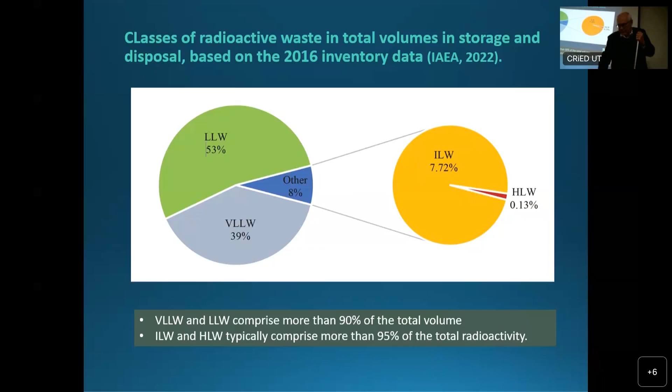So if we look at the aims of disposal of radioactive waste, I think it's quite clear it should contain the waste, and the waste should be isolated from the accessible biosphere. It should be kept away from humans and from flora and fauna. But also reduce the likelihood of an inadvertent human intrusion into the waste. So, for example, if there's a mining activity for whatever reason, it should be avoided that, because it is no longer known where this waste is, this waste is touched.

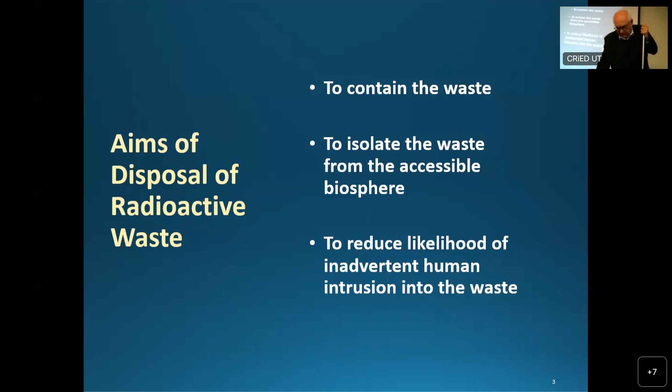We have different disposal options for the radioactive waste. For example, one is near surface, and one is in deep geological formations. The near surface is mainly for short-lived radioactive waste, so it will decay within a limited amount of time, and for low-level waste, also for intermediate level waste. And such disposal sites are already available in many countries. This is an example from Spain, which is for this short-lived radioactive waste, intermediate and low-level waste.

Then the next thing is the geological formations. In principle, this could be done for all types of waste and disused sources. Disused sources are, for example, small entities which contain a high concentration of radionuclides, which are used in medicine for treatment or for irradiation of food, which is done in some countries. However, geological disposal is in particular done for high-level waste, and this is for spent nuclear fuel and waste coming from reprocessing. However, such disposal facilities are not yet available in most countries.

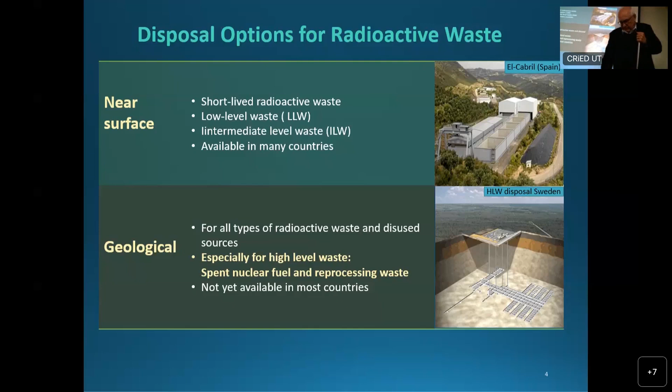So, when we look for disposal in geological formations, currently we discuss in principle three kinds of host rocks: salt, big salt formations, clay formations, or crystalline, for example, granite. So let's look a little bit more into detail at these salt formations. Salt has very specific characteristics. For example, rock salt behaves plastically under pressure. This means if there are some cracks, holes or fissures formed, due to the pressure of the overlying rock, they will be filled and closed. And if cracks do form, they are healed very quickly. This is a big advantage.

One other thing is the permeability. The permeability, this means the diffusion, for example, of radionuclides or of material through salt rock, is very, very low. And it can be considered nearly impermeable, which ensures the isolation of the waste in the disposal area. High-level radioactive waste produces heat. It produces heat for a long time because the radionuclides are so concentrated. By the way, if you go deeper and deeper in the earth, it gets warmer and warmer, and part of this energy is due to the radioactive decay of natural radionuclides.

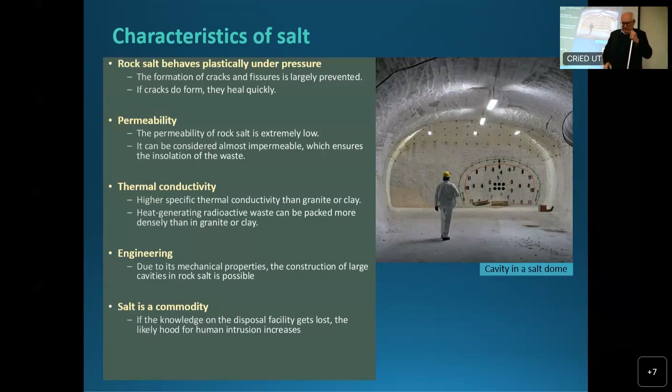Let's have a look at clay. Clay also has some very good characteristics. It also has some characteristics which are less favorable. For example, clay is impermeable to water. Once the radioactive waste is disposed, it will remain there in the disposal. And the water with the dissolved substances in the rock pores is practically immobile.

Another thing, you might know that clay has a great sorption capacity for cations. This means cations are sorbed readily. This means that the movement of cations in a clay formation would be very, very low. However, we also have some anionic radionuclides, as for example iodine-129, technetium-99 or selenium-79. They are anionic and they are not bound by clay.

Another good characteristic or feature is that clay swells in contact with water. So in contact with water, it absorbs the water and the volume increases. And this means if there are any cracks, the cracks will be sealed quite quickly.

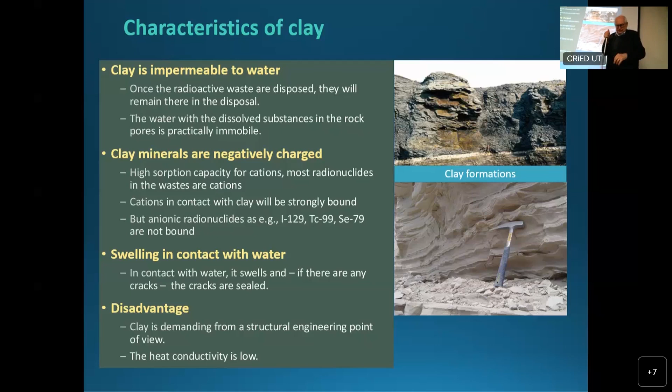Another host rock which is studied worldwide is crystalline or granite. Crystalline is a hard rock. And usually it occurs in massive forms. Examples are, in Canada, the Canadian Shield, which is mainly built of granite, or also Scandinavia and Sweden. This is more or less granite.

The permeability of crystalline depends. It is very low if the granite is not fractured. However, granite tends to have some fissures and fractures, and this would then cause a higher permeability and would also enable water to percolate through this granite. This is something which we in principle do not want. And therefore, because in this case the natural barrier is less effective than in salt or in clay, we have to have more engineered barriers.

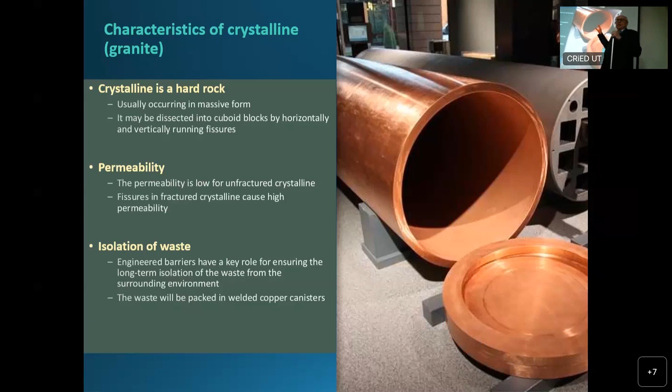And in the waste disposal projects so far dealing with granite, the waste is put into copper canisters, and these copper canisters are very carefully welded and then put in the ground. And in addition, as an additional barrier, these canisters are surrounded by bentonite to enable the sorption of radionuclides should they be released from the canister. So we need some additional engineered barriers to enable the long-term isolation of the waste.

Here you see a comparison of the three kinds of host rocks. In green we have the favorable features. In red are the unfavorable features. And yellow is the middle, not really good, but also not really bad. So you see, all of these different host rocks have advantages and disadvantages. So for the thermal conductivity, salt is quite good. Clay is low and crystalline is medium.

The permeability of salt and clay is very low, but it may be high for crystalline if the crystalline is fractured. The firmness is medium for clay and for salt, but very high, of course, for granite. This is a hard rock. The deformation characteristic is positive for salt because it closes cracks immediately because it's creeping. It is closing any fractures. It's medium for clay, but crystalline is quite brittle. It does not have such a tendency of self-healing.

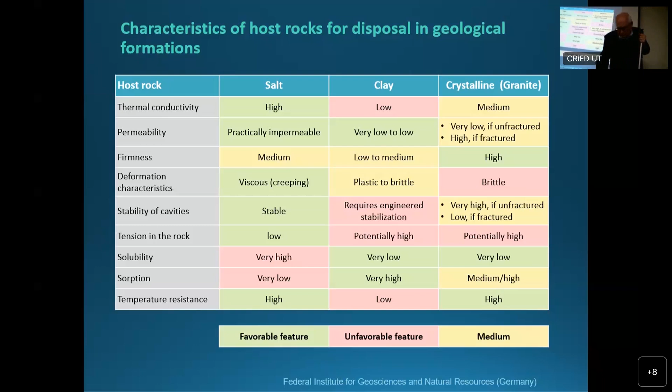Now, let's look at some examples of disposal facilities which are planned or under construction. First of all, Finland. I start with Finland because Finland is most advanced in this area. They are already constructing a disposal facility for high-level waste, and they started construction in late 2016. This facility is located near the Baltic coast in the southwest of Finland.

The disposal of spent fuel is planned in crystalline rock at a depth of 400 meters, and the waste will be enclosed by copper canisters as we have seen before. In 2021, Posiva, the Finnish waste management organization, started construction of the first emplacement. The plan is to come into operation in the mid-2020s. And this would really be the first operating disposal facility for high-level radioactive waste.

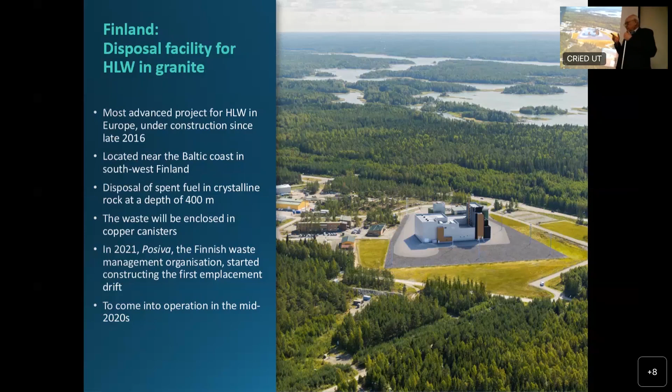There's one other, WIPP in the United States, but WIPP is planned to accept military waste in particular. So this would really be a novelty if this happens. This waste disposal facility is called the Onkalo Disposal Facility for spent fuel. You see, this is built in these big granite cavities, and it consists of an engineered system of different tunnels.

And an underground laboratory was set up in Onkalo to study the host rock and also to explore and elaborate the data which are needed to demonstrate safety for this disposal facility.

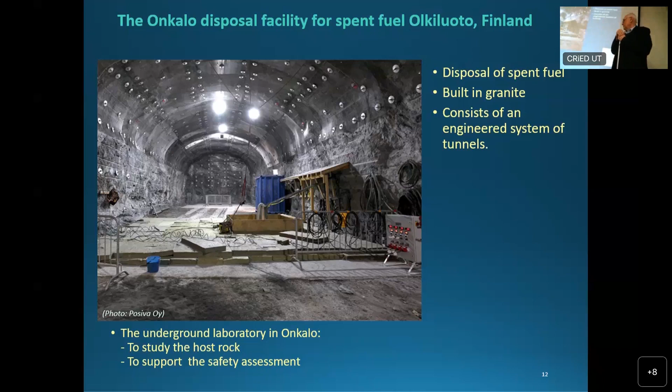And here you see the multi-barrier system for high-level waste. This is a cladding tube, this is a fuel element. They go into this special containment, and this containment goes into this copper canister. These copper canisters are welded. They are put in such a cylindrical hole, and then they will be surrounded by bentonite. Then everything is closed and sealed with bentonite, at the bottom of the underground of this waste disposal facility.

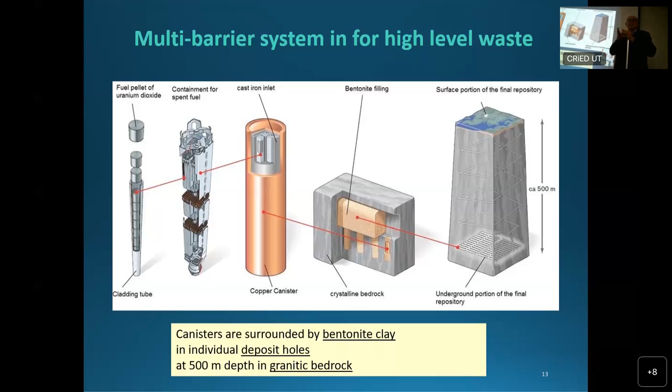So it's a multi-barrier system combining both natural barriers and engineered barriers. And this is the case in all these concepts for disposal of high-level waste, that you always have a combination of natural and engineered barriers. And as I said, depending on the host rock, the combination of engineered and natural barriers has to be modified accordingly.

In France, they plan a disposal facility for high-level waste in clay. An underground laboratory has been in operation since the year 2000 by Andra, the French organization for the management of radioactive waste. This laboratory is located about 250 kilometers east of Paris.

Close to this underground laboratory, there's a potential site for disposal of reprocessing waste, Cigéo, which is nearby. Here, the waste will be disposed in clay rock at a depth of 500 meters. The license application for constructing this disposal facility will be submitted soon. We will see. The plan is that this disposal facility goes into operation in about 2040. So it's still a long time.

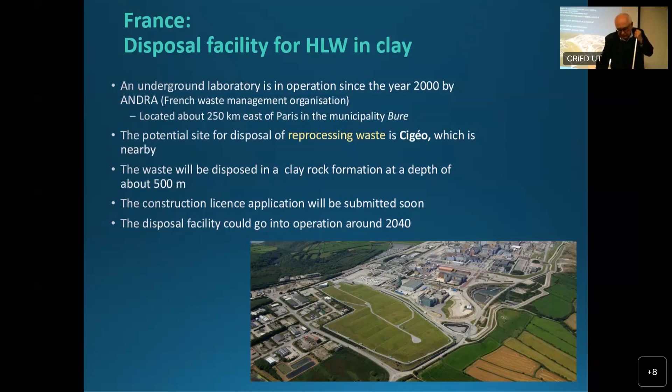In Switzerland, and I heard you will go to Switzerland this year, Switzerland is also quite well advanced. They plan a disposal facility for low-level, intermediate-level, and high-level waste in clay. In Switzerland, site selection started in 2008. In the beginning, they looked at both granite and clay. And in 2022, just a few months ago, they decided that the site should be in Nördlich Lägern, in North Switzerland, close to the border with Germany.

In 2024, next year, they want to submit a license application to the authorities to get permission for constructing and going forward with this project. But nevertheless, it's a long process. In 2034, the construction work for the underground studies will start. And in 2045, more than 20 years from now, there will be construction of the section for low-level and intermediate-level waste.

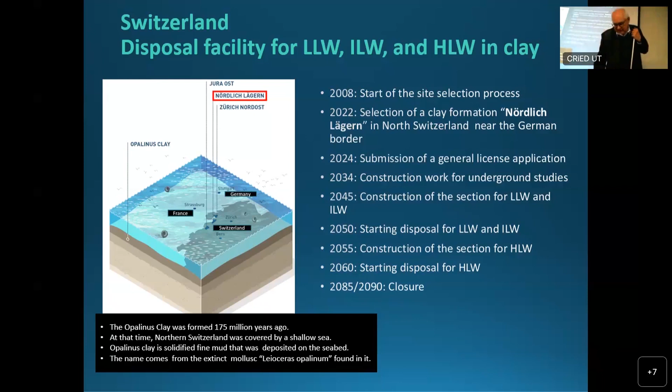So Switzerland is so far quite well advanced with that. The Netherlands is a bit special. The Netherlands have only very little high-level radioactive waste because they had, I think, one or two nuclear power plants running. They are meanwhile shut down, so they don't have too much. So they didn't really know what to do. Maybe they were thinking about constructing new nuclear power plants.

So until they come to a decision, they decided to have an above-ground storage facility in the south of the Netherlands. This facility is dedicated to long-term interim storage of high-level waste. So far, it was defined for a storage time of at least 100 years, but it is said it could stay there longer.

It was constructed in compliance with very high safety standards, so it can resist fires, earthquakes, explosions, direct aircraft impact, and flooding. It is operated by COVRA, a Dutch organization for waste management. The facility has been in operation since 2003.

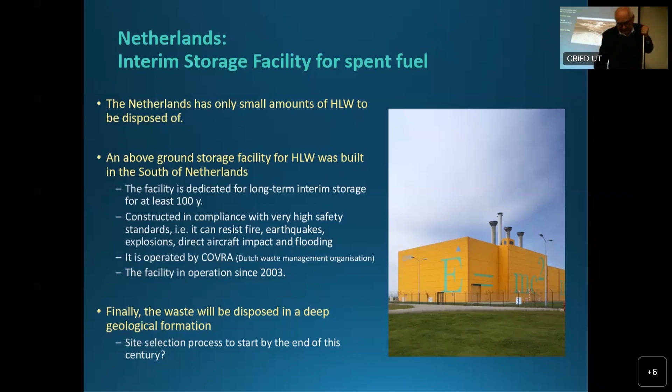Sweden has a similar concept as Finland. However, the Finnish concept started after the Swedish concept, so that's why there are a lot of similarities. Finland is taking experience that was made in Sweden. So again, this is Scandinavia. The Scandinavian shield consists mainly of granite, so also in Sweden the waste will be disposed of in crystalline rock. The site is about 140 kilometers north of Stockholm, the capital, and it is close to the sea. And currently, I think, two nuclear power plants are working there.

A license application was submitted in 2011. The government's assessment is ongoing, or I think it's close to the end meanwhile. But it is a complex issue, and further questions came up. So additional material was submitted, in particular on the sustainability and persistence of the copper canisters, because this is a key element of the isolation when disposing waste in granite. The idea now is that construction of the facility could start in the mid-2020s. By the way, a disposal facility in granite has already been in operation since 1988, for low-level and intermediate-level waste.

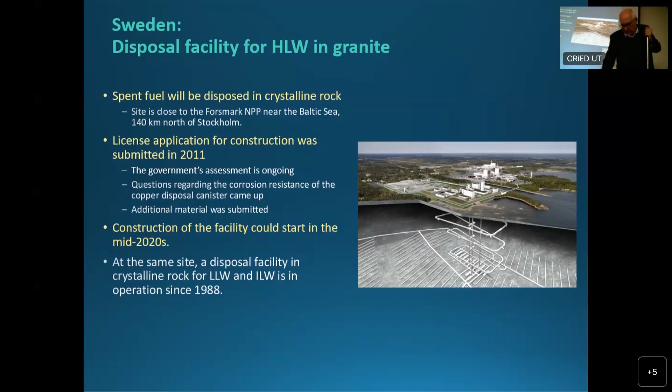Canada also has a lot of granite. The idea is also to have spent fuel assemblies disposed of in deep geological formations. They have started a site selection process, and this selection process is based on voluntary applications of communities which have an appropriate geological formation, and those communities could volunteer to host this facility. Of course, when such a project is implemented, there are a lot of investments, a lot of people coming, money comes into this area, and there would be an economic advantage.

Meanwhile, there are two remaining communities, locations. Both are in East Canada, in the province of Ontario. One is in sedimentary rock, a kind of clay, and Ignace is crystalline rock. In 2021, the South Bruce site will be further explored by drilling deep boreholes. The siting decision is expected for 2023.

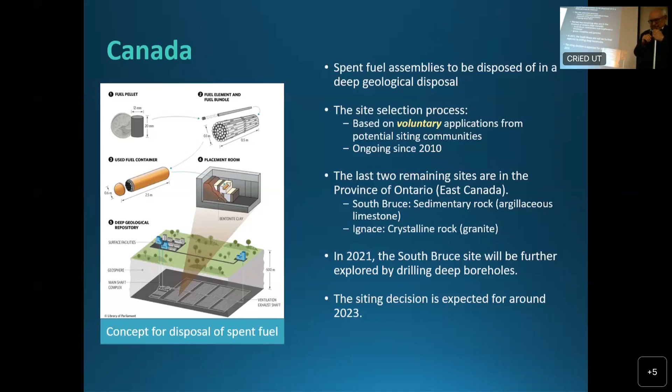In Germany, the site selection process restarted. It already started in the late 70s, when a site was selected near Gorleben for disposal of high-level waste in salt rock. Underground investigations were performed from 1979 to 1999. By the way, in 1999, the Green Party became part of the federal government for the first time. There could be a connection.

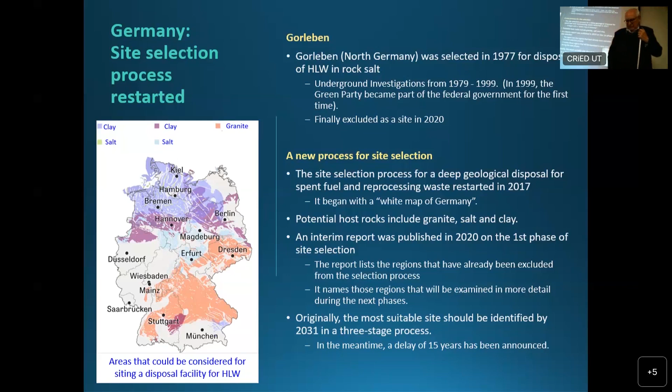Let's have a look at the United States. I mean, you have been in WIPP, the Waste Isolation Pilot Plant, and this is in operation in Carlsbad, New Mexico, since 1999. It was dedicated for military waste, as you know, and it was built in rock salt at a depth of about 650 meters. The closure of WIPP is expected around 2050, and the US has several near-surface disposal facilities for low-level waste and for intermediate-level waste. So WIPP is for military purposes, and it is not the solution for all the other high-level waste which comes from the nuclear power plants.

Already in the last century, a site was characterized and investigated in Yucca Mountain. Yucca Mountain is in Nevada, in the west of the United States. And at Yucca Mountain, you had in the 40s, 50s, and maybe 60s, the Nevada test site where above-ground and underground nuclear tests were performed. And the site is within this area. The site is on the top of the mountain, and this is a volcanic ridge in the Nevada test site, about 160 kilometers northwest of Las Vegas.

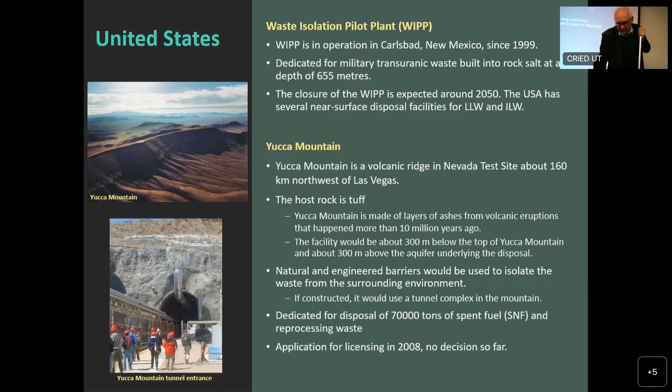So we have seen that there is a long way from the concept to the start of disposal. In the case of Switzerland, it is from about 2008 to the end of the century. It's very, very long. So the question is, why does it take so long? First of all, such a disposal system is a very complex system. You have different areas you have to look at very carefully to demonstrate safety. And at the end of the day, you have to demonstrate safety.

This means you have to demonstrate that you have isolation from the biosphere, and should radioactivity come to the biosphere, you should demonstrate compliance with current radiological criteria. This means you have to be sure that also in 10,000 years or 100,000 years, the dose to the people who would live there is not higher than would be allowed today. And because it is in the very far future, this makes it a bit difficult.

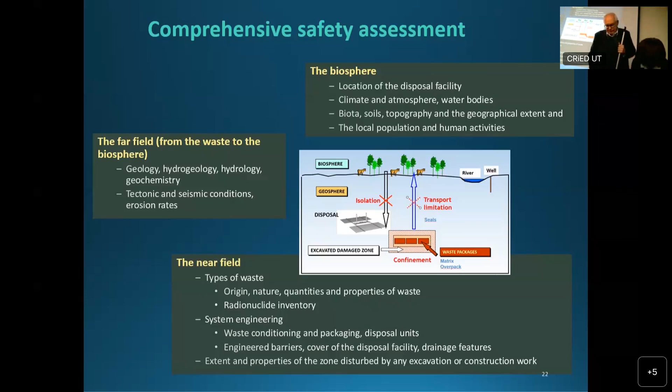And this is the last slide. So the question is, why do disposal projects for high-level waste need so much time? As I said, the site characterization is time-consuming. You have to develop all these models for the biosphere, the geosphere, and the engineering has to be adapted to that. So it requires a comprehensive assessment, which includes all these aspects, to be able to finally demonstrate that the whole system is safe, and to demonstrate the compliance with radiological criteria for up to 1 million years. This is really a challenge.

Another aspect is that in general, projects for radioactive waste disposal are very unpopular. People don't like it. People are afraid of radiation. It is as it is. It has many reasons, and it would be another presentation. So in many countries, you have a lack of public acceptance. And a lot of these objections also lead to court cases. People protest and they go to the court. Such a case may be very long and take years.